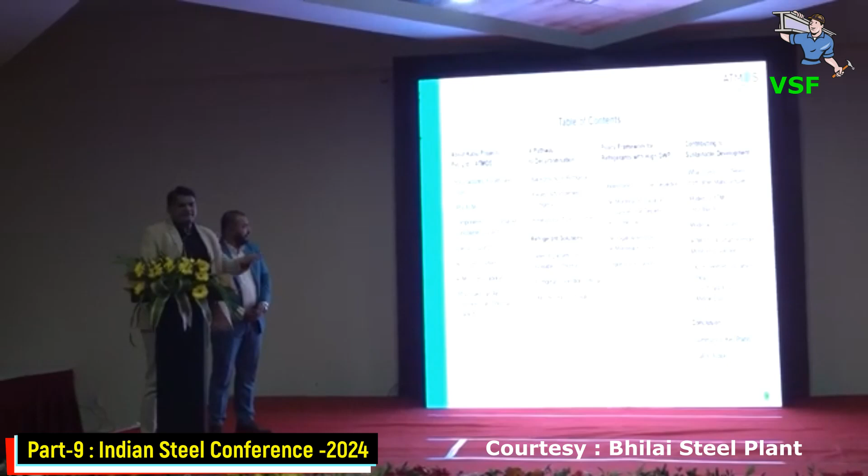About Kabu Projects: Kabu Projects Limited is our company name, located in India. The important part of our company is that it is Make in India but with German technology. Atmos is our brand name. These are the various industry grade air conditioners which we can use in high applications. This is our factory in Noida.

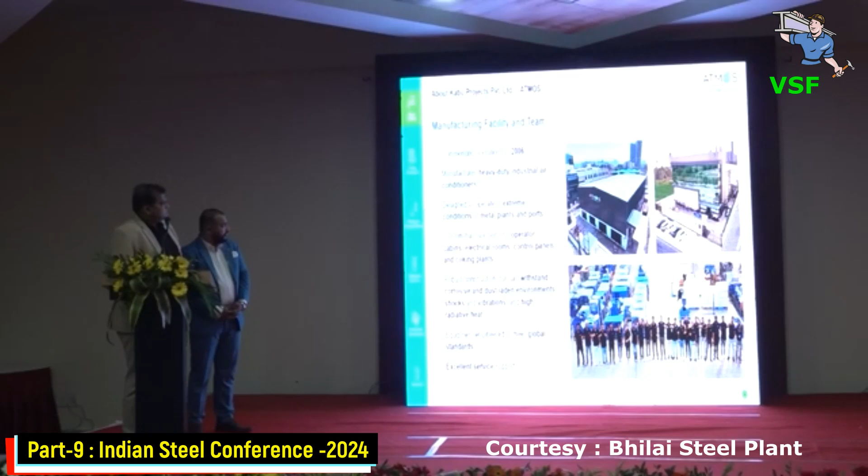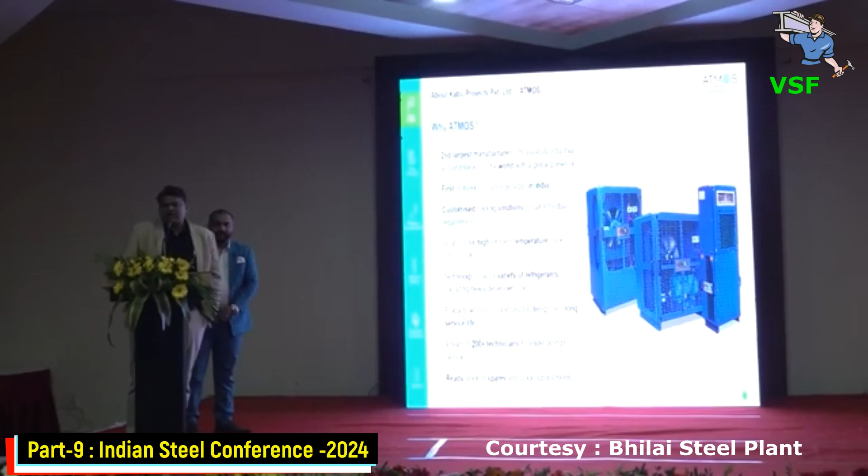The specialty of Atmos. Why Atmos? The Atmos AC can work up to a temperature of 90 degrees Celsius, so it can be used in SMS, steel melting shop, your hot strip mill, coke oven. So in all the steel applications we can use our Atmos machine without any hindrances.

These are the various components. Most of the components we are using in the air conditioner are of the latest technology and of very good quality in the world. So for our product, don't worry, we are there to provide you one of the best products in the world, and that too with the most eco-friendly equipment and components, including refrigerant. These are the heat exchangers.

The important part of Atmos is that whatever machine we are making in-house, we are testing in-house only. We keep all the stringent conditions like temperature, 90 degrees. We can maintain that temperature in one room and test our machines so that you will get a machine with accurate performance. These are the various components.

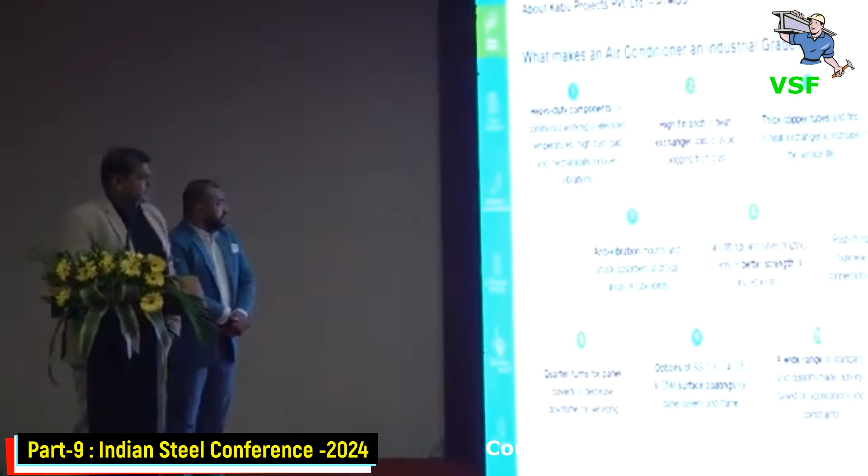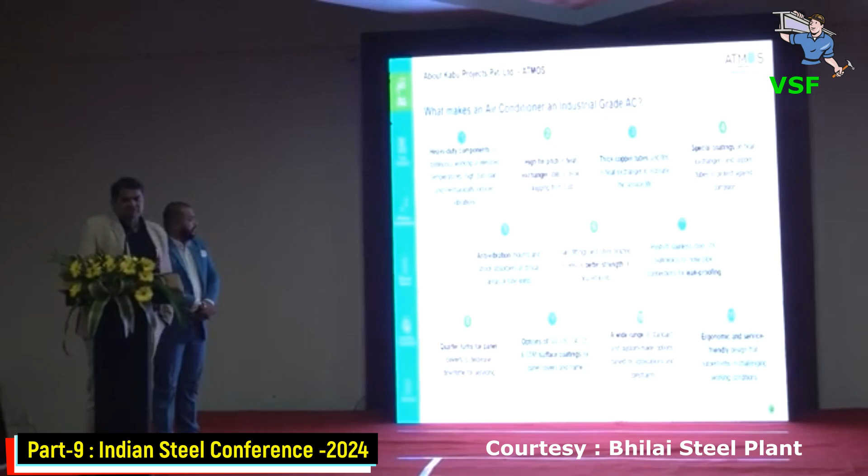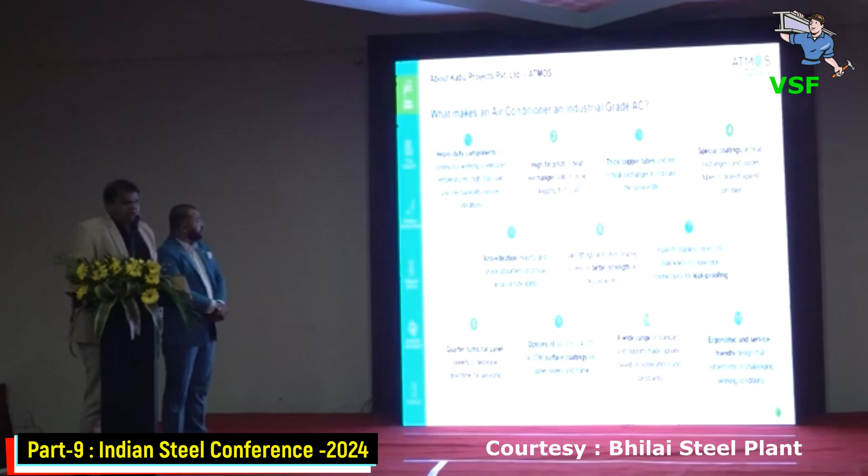The specialty is that our AC can work, as I said, in high ambient temperature up to 90 degrees. Also, in the most dusty environment, our AC can work without any hindrances. And in very stringent conditions like the coke oven, where various gases are there, our ACs can work. Vibrations are also taken care of through design, so that any kind of vibration will not affect the performance of the AC. We can use stainless steel plates also as per the application. Now, the next part is decarbonization, which my colleague Raj will take you through.

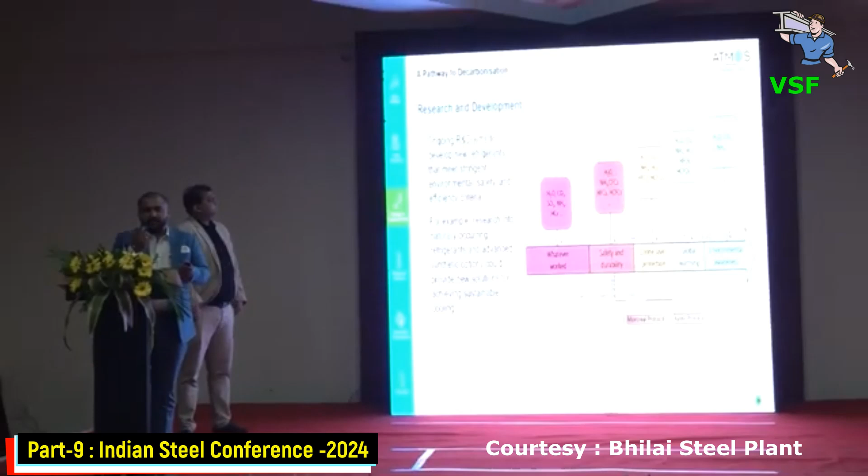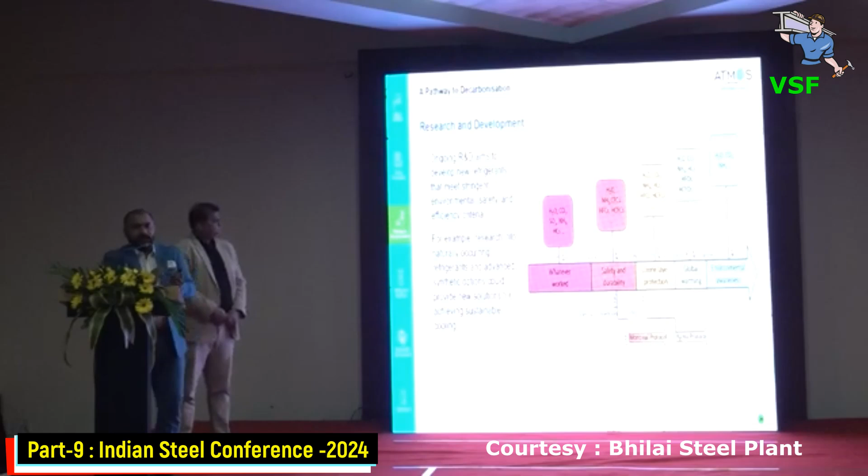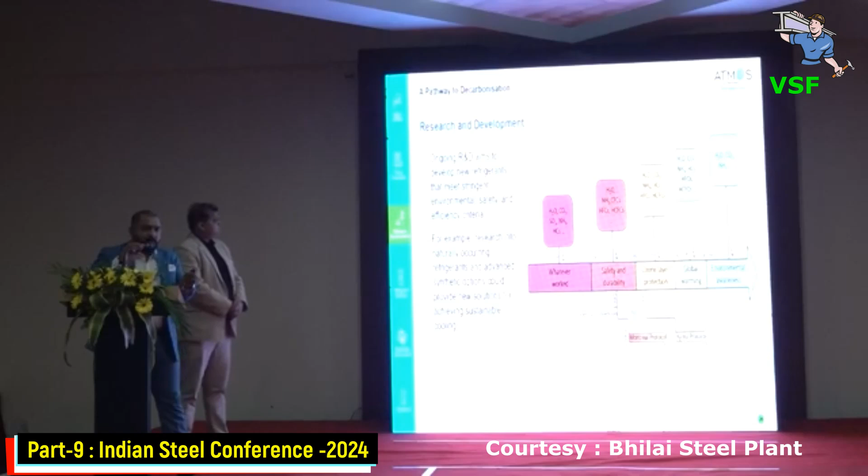Now we need to cover, control and safeguard the ozone layer because of the harmful UV rays that come to us, and it is not preferably good for our human health. So on that basis we wanted to safeguard it. So how could we do it, this was the reason it came up. And these were the responsible people and the conferences around who actually started implementing protocols and laws to regulate these things around.

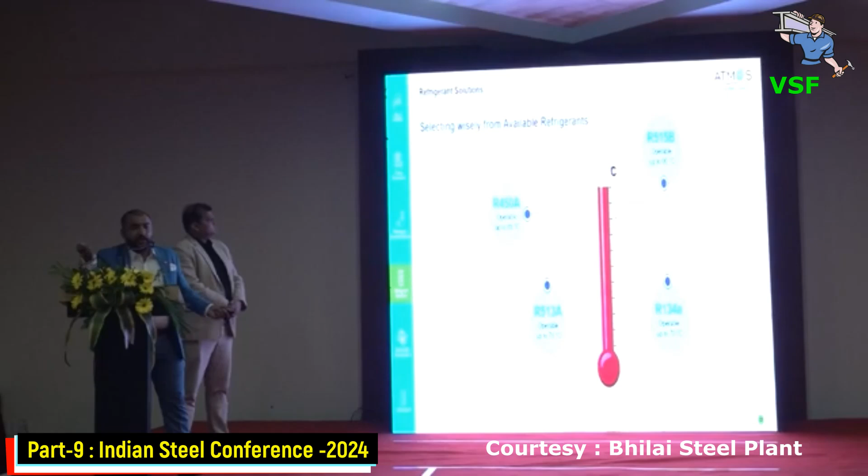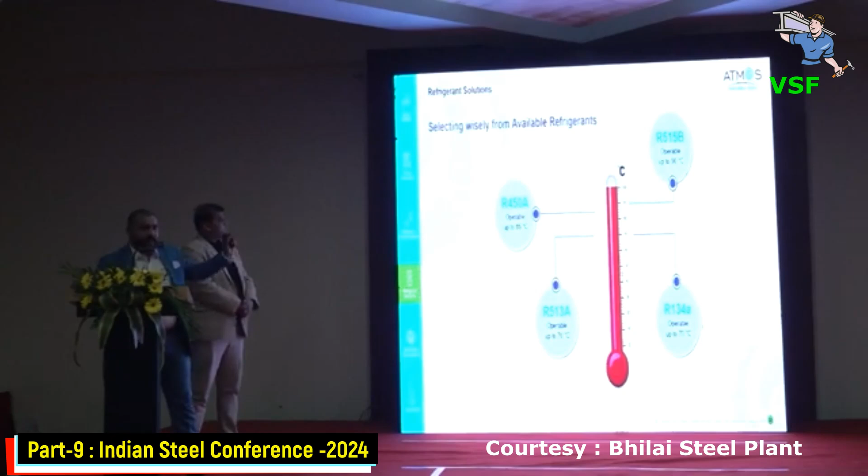R134 we all know, everyone who rents a car. In cars, the refrigerant they use, we call it eco-friendly refrigerant, that is R134A, but even this has a carbon footprint. So this trend of minimizing it is making us work towards getting an optimum solution and replacements for the existing refrigerants that we are using. So currently 450A is the beneficiary that has been recognized as of now.

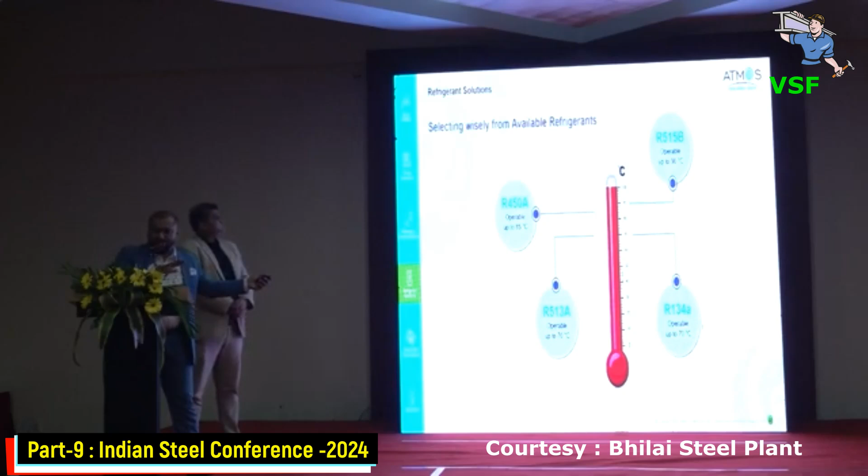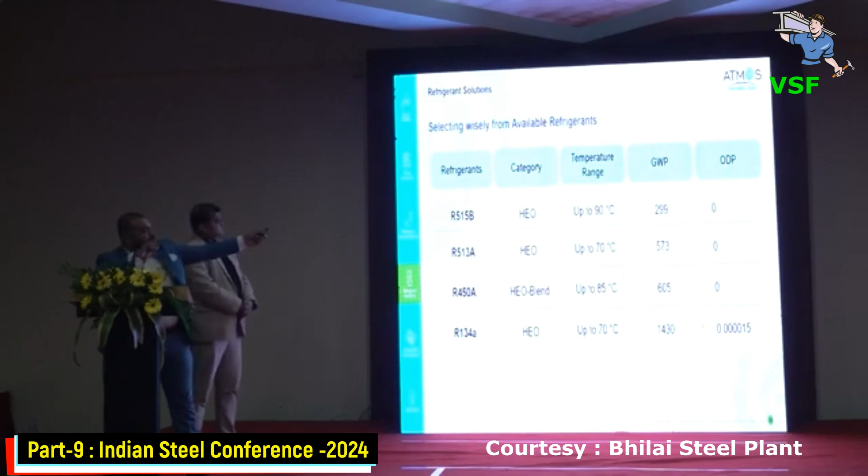This is a range just to understand how it works. GWP is global warming potential and ODP is ozone depletion potential. So these are the refrigerants. If you can see, R134, as I rightly told you, the carbon footprint for it, the global warming potential is 1430, and it also has an ozone depletion potential you can see here on the figure.

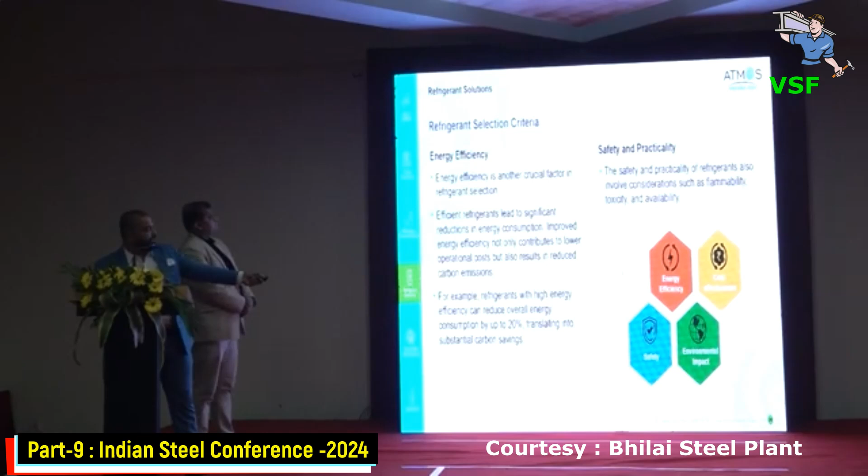So how do we choose, what is the necessity and phenomena to understand and choose a refrigerant? It's based on the following factors you can see: first, environmental impact; second, safety; then cost effectiveness and energy efficiency. Based on these, we choose a refrigerant and then it is made to work.

Our machines are already running in the rigorous areas of SAIL, coke oven. So if our machine is sustaining that area, that environment, it can run anywhere around the SAIL, anywhere around the globe.

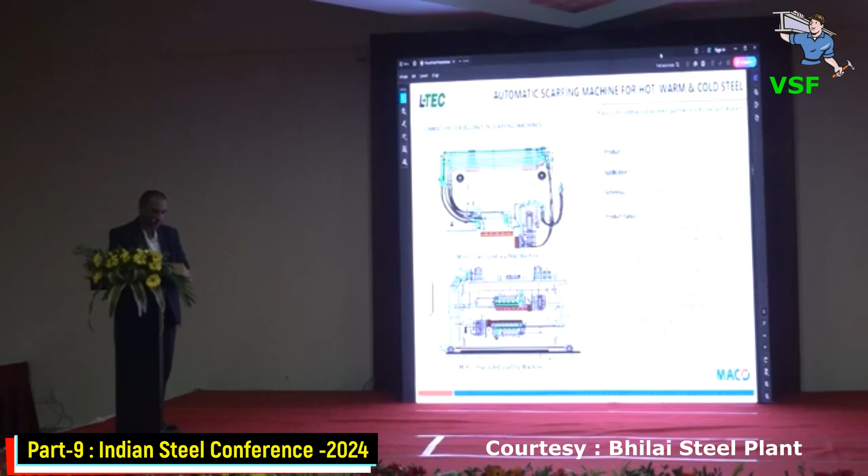Oxy cutting machine for the continuous casting machine, CCM.

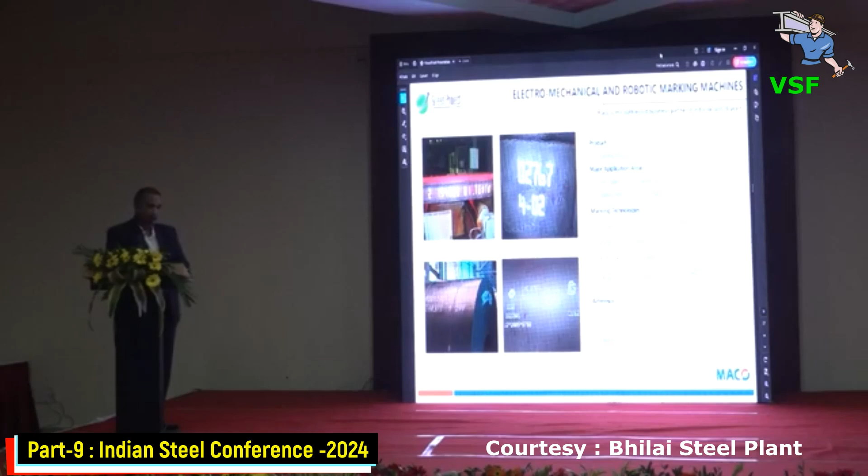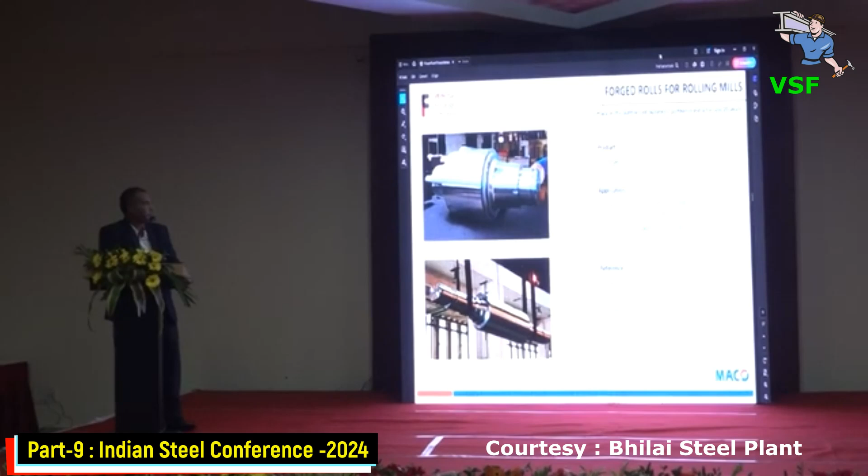Laser welding machine, CO2 and solid state type for the coil joining. Cobra neck hydraulic buffer. Formosa industrial gearboxes.

Genie articulating telescopic boom and scissor lift. Our product range is aerial work platform, scissor lift, articulating boom, telescopic boom, and maintenance platform.

Ansul make fire suppression system, for the metal processing equipment.

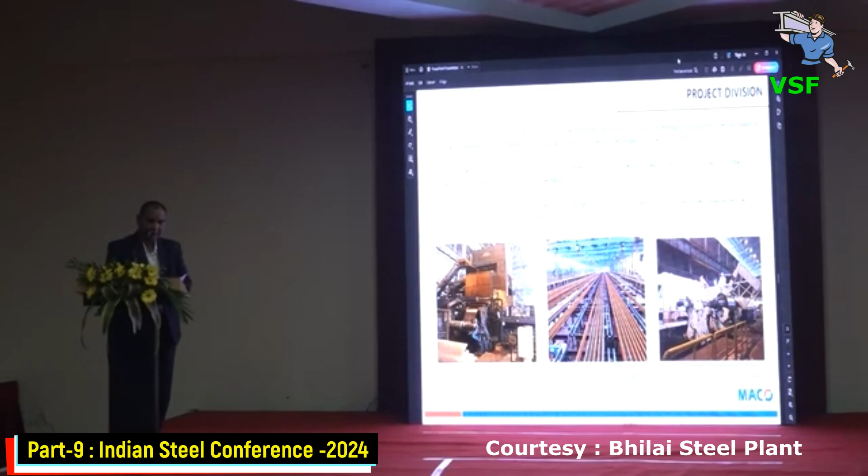The rail welding line for 260-meter long rail at SAIL Bhilai Steel Plant, installed in the URM area in Bhilai Steel Plant.

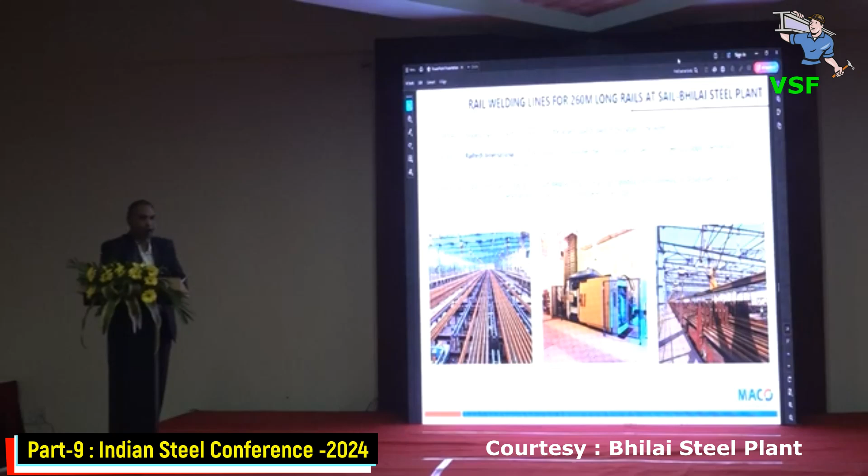Refinishing complex at SAIL Bhilai Steel Plant. It includes two packages: package 1 mainly for equipment supply, installation and commissioning, and package 2 for PEB - pre-engineered building. It's the first of this type of fabrication unit. The pre-engineered building is supplied by MACO in the SAIL area.

Roll and repair shop at Bhilai Steel Plant. In the URM area, the carbide preparation unit, carbide blade preparation unit is supplied by MACO Corporation. Complete installation and commissioning is done by MACO Corporation.

Installation of high pressure primary descaling at plate mill of SAIL Bhilai Steel Plant. The project is right now in the execution part, right now in the execution area.

Hydrogen bell annealing furnace at SAIL Bokaro Steel Plant. Skin pass mill at SAIL Bokaro Steel Plant. Tension leveling and inspection line at SAIL Bokaro Steel Plant. Slab marking machine in CCS at SAIL Bokaro Steel Plant.

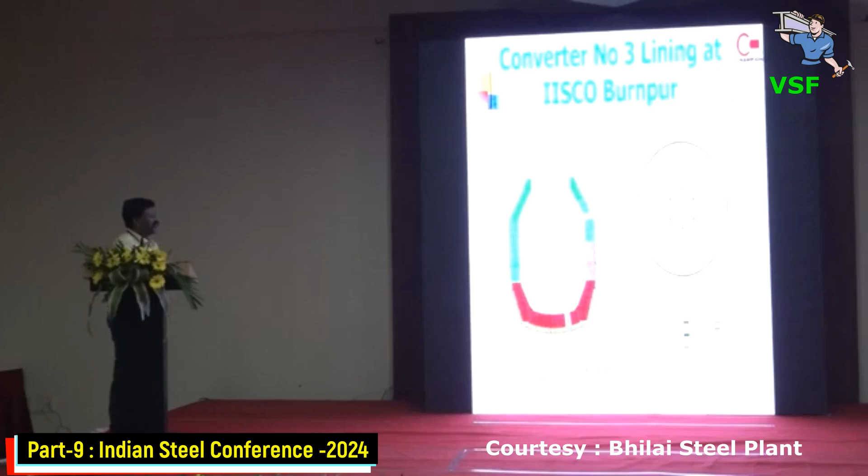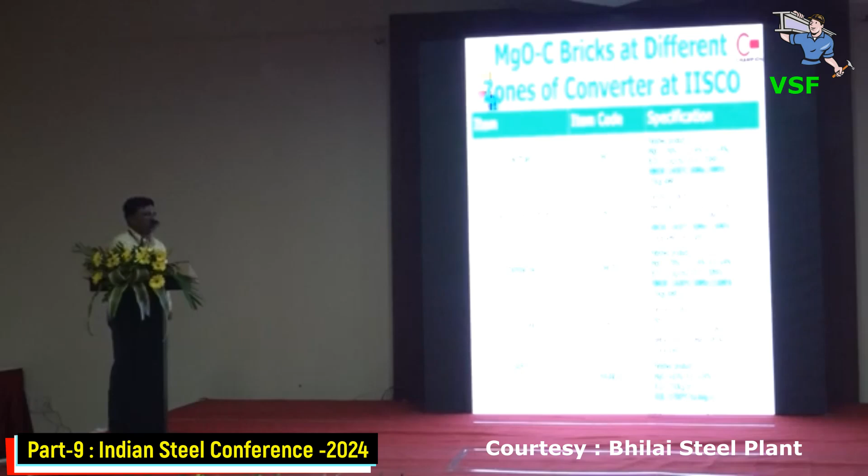But the most important thing to be mentioned is the HMOR, the hot modulus of rupture, that is strength at elevated temperature, which is around 140 kg per centimeter square, one of the highest we have achieved. Now this is the bill of material, the total bill of material. This is basically the sleeve, block, and the taphole sleeve being used.

So earlier the target life of this converter, the guaranteed life, was 3,500. The highest life they had achieved was 5,800, and as I mentioned, it is running around 7,800 heats. So we had targeted some number of sleeves, but as the life is going, we are supplying the sleeves. The sleeve life is around 100 heats.

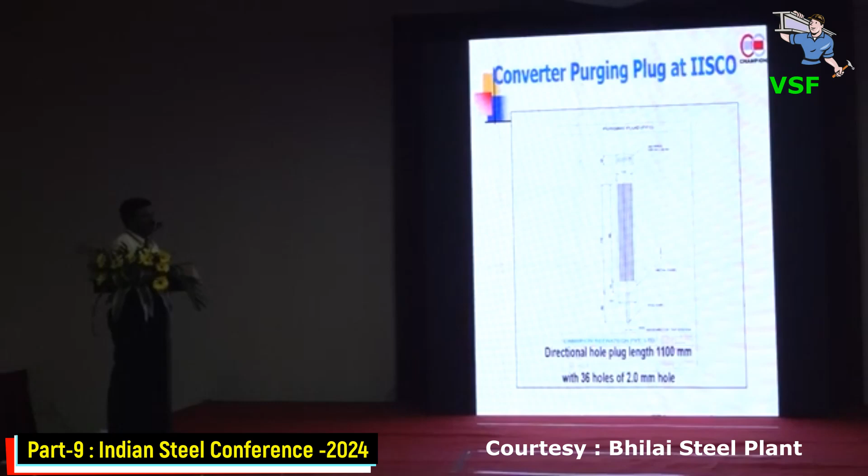And this is the purging element. It is basically a directional hole purging element. They have 36 purging holes, about 2.0 millimeter, and they have used it up to 3,000 heats. The top and bottom ring after that converted into the normal top ring.

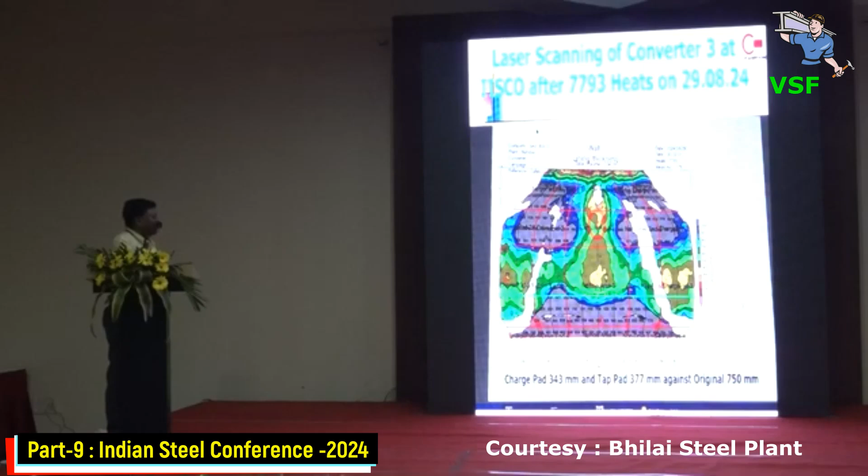And this is the laser profilometer being used, and this is the graph where you can find out the tap pad thickness, as I mentioned: the charge pad is 343 millimeter, and the tap pad is 377, out of 750. This is the bottom thickness we are getting. It is varying between 1359 to 1751, and we are doing the bath height measurement along with the lance position, and the total volume is being maintained to maintain the H/T ratio.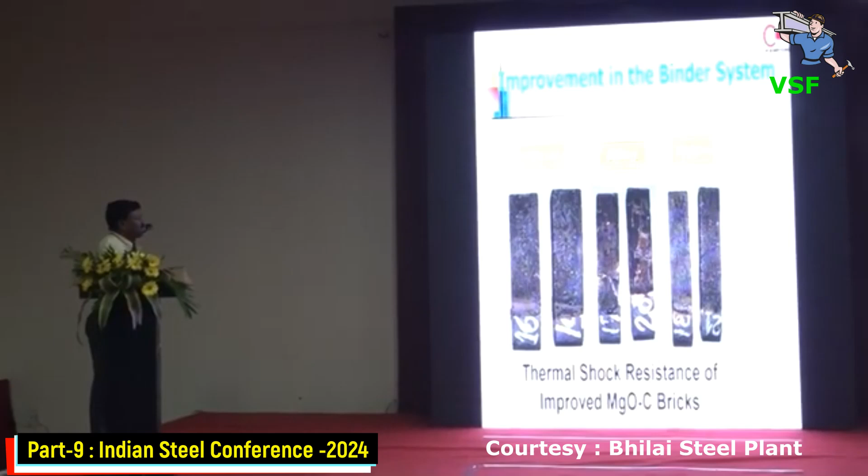This is the thermal shock resistance; it's a dynamic test where you put the magnesia carbon dip into the induction furnace, and then you can find out the different types of crack and thickness. And this is about the thermal shock resistance test. You can see the binder plays an important role. Binder 1 is giving a lot of cracks, binder 2 not much, but we are using a combination of binder 1 and 2.

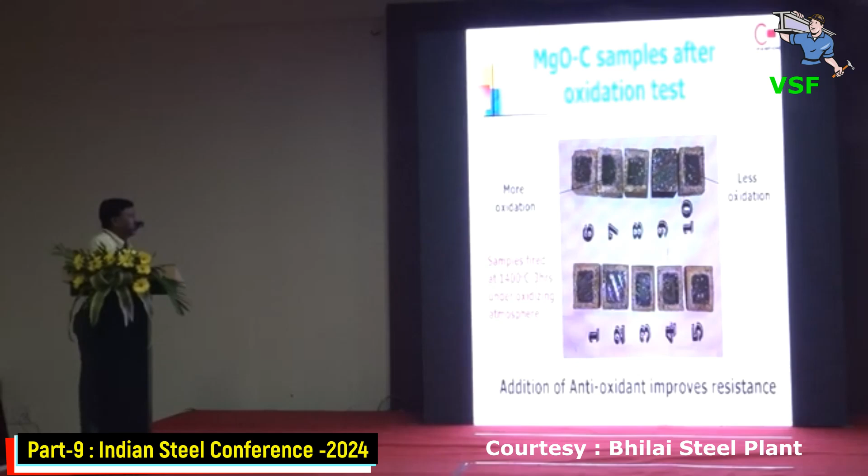At this moment, I must mention that our plant is situated in Champa. We are producing at present 3,000 tons of magnesia carbon bricks. Our turnover is about 450 crores now.

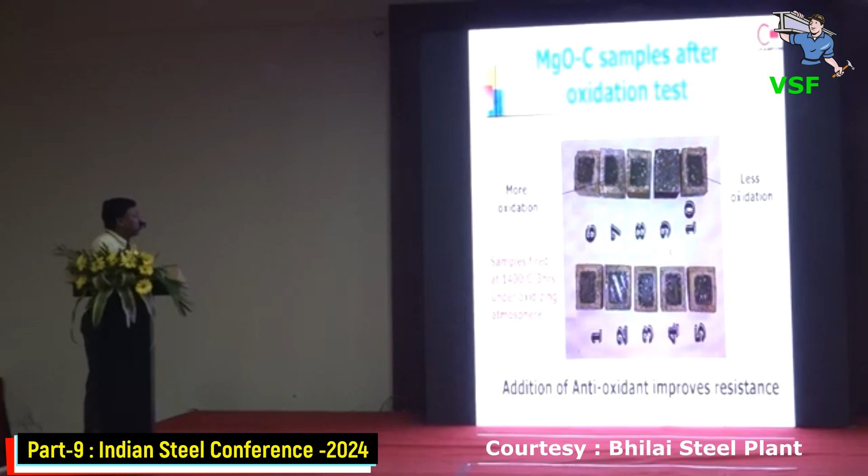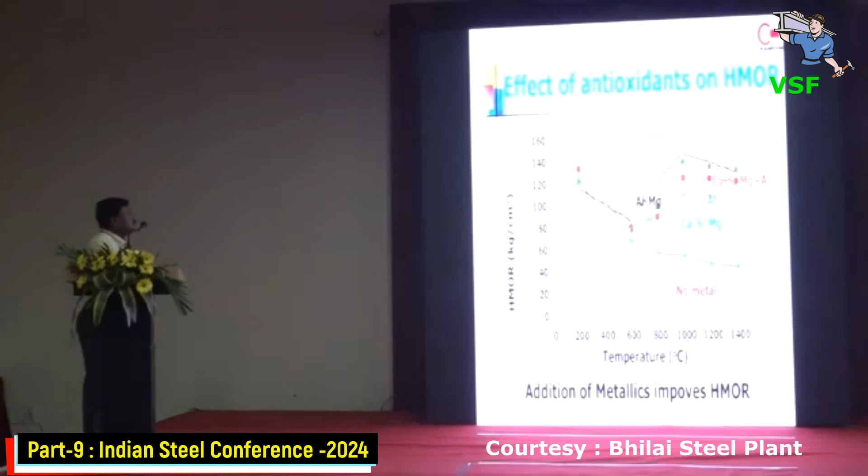This is one of the most important things, the oxidation resistance. We do the oxidation resistance test. The white area is oxidized, the black is not oxidized. The more black, the better. And for that we use a special antioxidant. If you collect a brick sample from the furnace, you can find different zones, like the slag surface, decarbonized or original. The more original there is, the better. So this is the antioxidant, and you can get the HMOR more than 120.

And we have done some study on slag, because basically it's monitoring of slag. The slag should have properties like low melting, low viscosity, low surface tension. And we have done some phase diagram study. In this phase diagram, we found that if you can produce tricalcium and dicalcium silicate, the melting point is 1990 to 2030. And if you have calcium ferrite, it is 1216, or fluorspar, which we add for fluidity, it is 1340. So we have to avoid all these things.

For converter, we need magnesium oxide. Those are the phases we have to get so that you get better life. We have also done slag coating and slag sticking studies, because basically we have to give a good slag coating. So we are making bricks having good permeability, so that we get good slag sticking, and that's how we can develop the slag.

Another important one is the MgO saturation, depending on the basicity of the slag, whether it's silicon killed or aluminum killed. So we have designed the refractory so that you have less saturation. For converter, basically with basicity more than 3 you get only 6.5%. And in the ladle, if it is less than 2, you get more, about 12%.

And for that saturation, because steel making is nothing but slag making, you should have good lime. That is basically low LOI and high reactivity, reactivity more than 300, and dolomite also the same. So we have developed a slag modifier, because if the slag is not in a position to give you the proper reactivity and slag making, so this is in briquette form.

So I have validated two strength properties, that is characterization of its shakedown properties, and found out how it is environmentally better to use. So first of all, this is the engineering property, that is shakedown. It means that whatever stresses come to the aggregate, it makes the aggregate in a stable condition, and if the load exceeds the stable limit, it converts elastic strain to plastic strain, so the curve shifts from elastic strain to plastic strain. Plastic strain is nothing but the plastic shakedown limit.

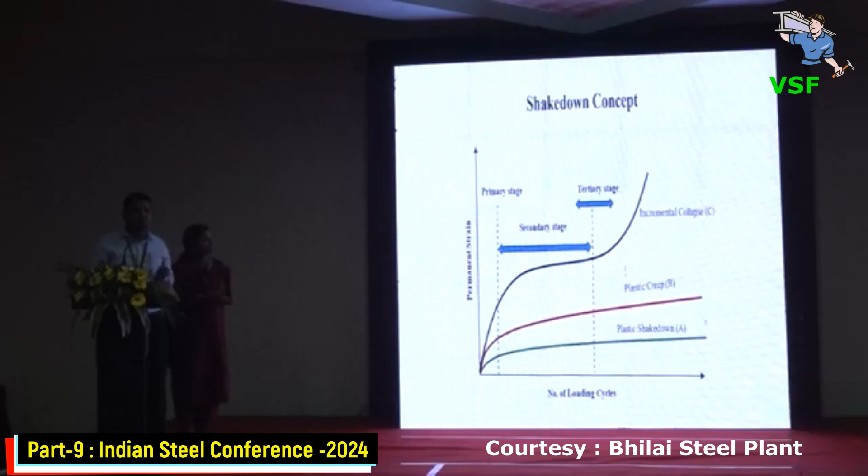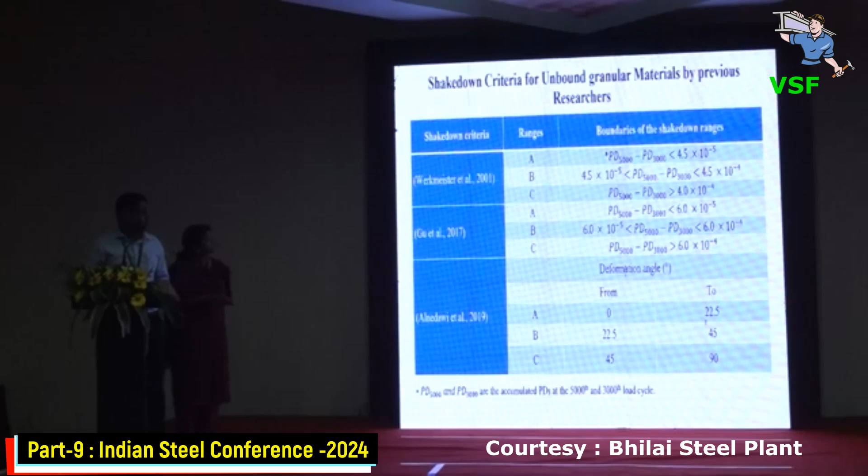So we have to test the strength characteristics of the aggregate before using it in a base or sub-base layer. That is the base or the foundation of the road. So I have validated its properties. These are the previous literature works that satisfy the permanent deformation of the aggregates in 5000 to 3000 load repetitions, whatever plastic strain should come to the aggregate.

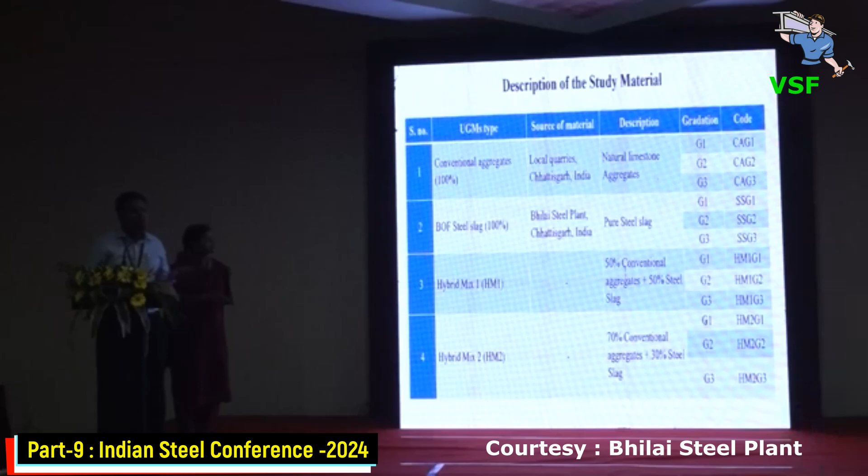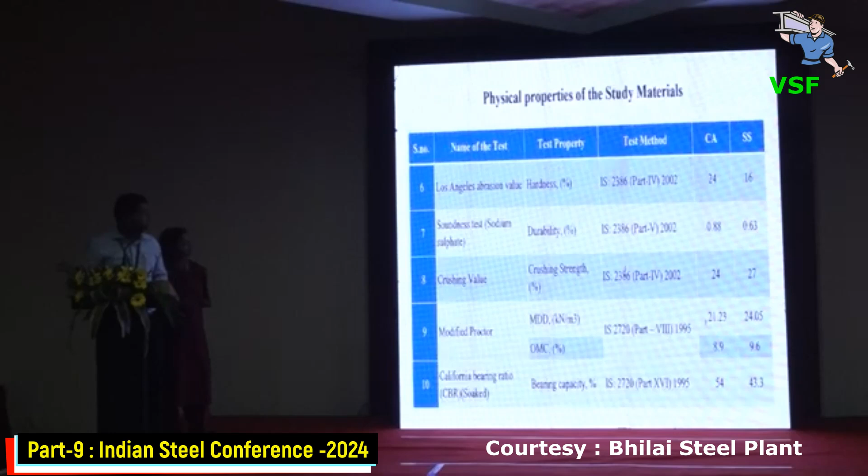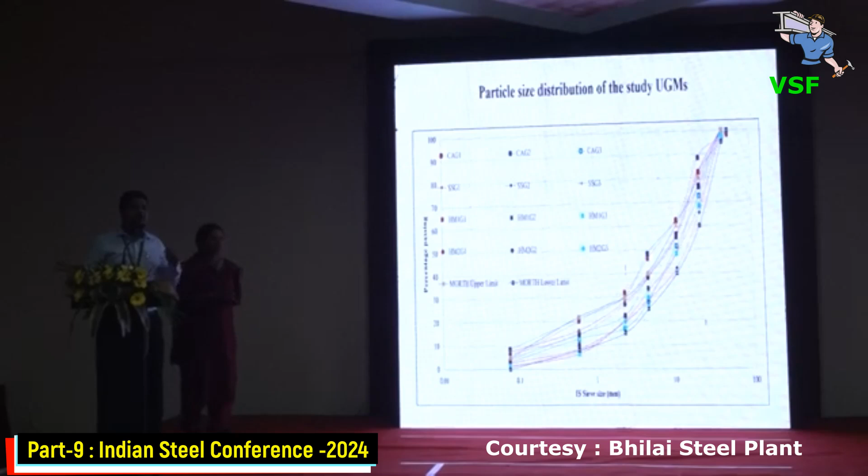We have collected steel slag from different depths that satisfy different ages, that is less than 1 year from the top layer, then beneath 5 meters we got 1 to 10 year old steel slag, and after 5 meters we get greater than 10 year steel slag. So depending upon the age we have categorized the properties.

So these are tested in 3 moisture conditions. OMC is nothing but optimum moisture content at which we are making the roads or the materials to be utilized. And OMC +2% means if it comes in contact with rain, whatever the swelling nature and wetting properties, we have defined by increasing the moisture content 2%, and OMC -2% means if it is tested in the dry condition, whatever property it is giving.

First, the introduction. What is the surface defect in rolled steel? The imperfection that occurs on the surface of the steel during the rolling process is known as the surface defect. It may be of different types like scars, holes, bubbles, inclusion, iron oxide scales, roll printing, edge cracking, and scraps. The main idea behind this work is: can artificial intelligence automatically classify and detect the surface defects?

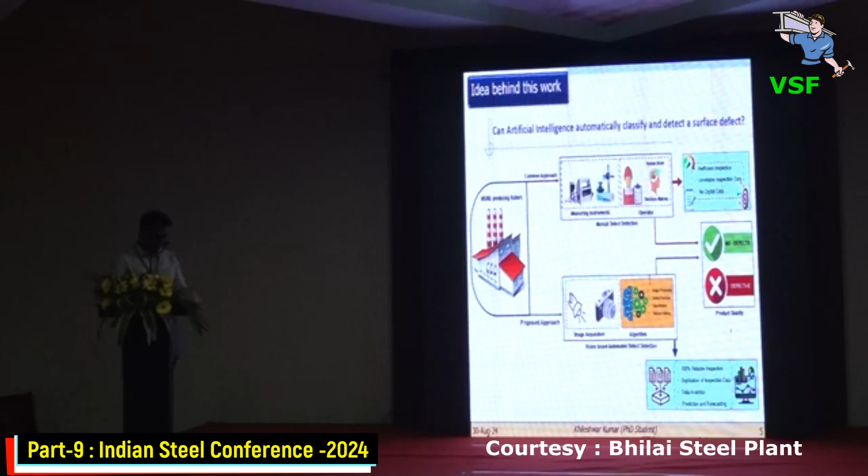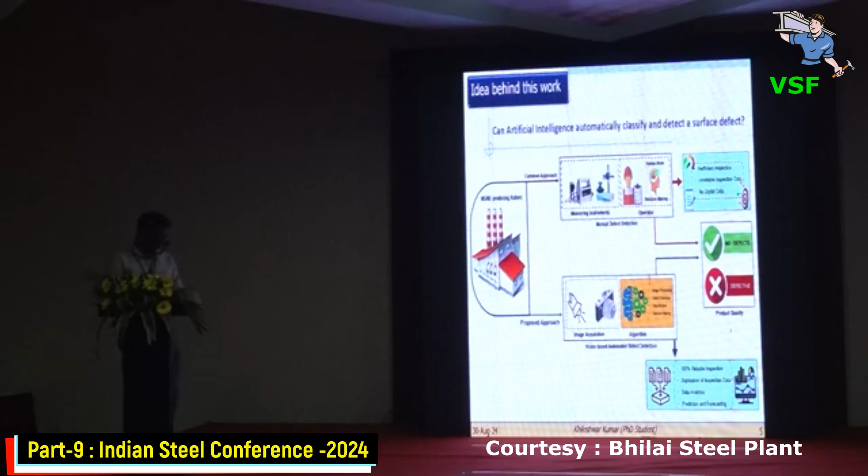Previously, the surface defect was identified by measuring instruments and the operator. This may cause problems of insufficient inspection, unreliable inspection data, and no digital data. So we have proposed an algorithm for automatic image acquisition, and the algorithm will detect the steel surface and classify whether the surface is defected or not defected.

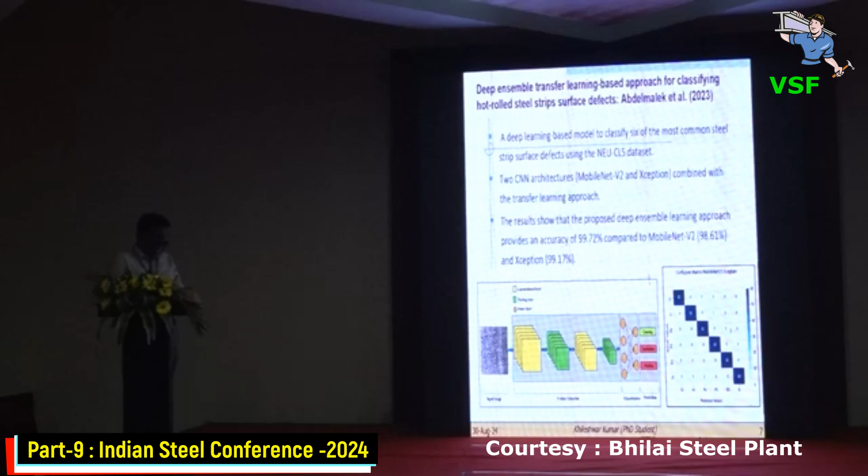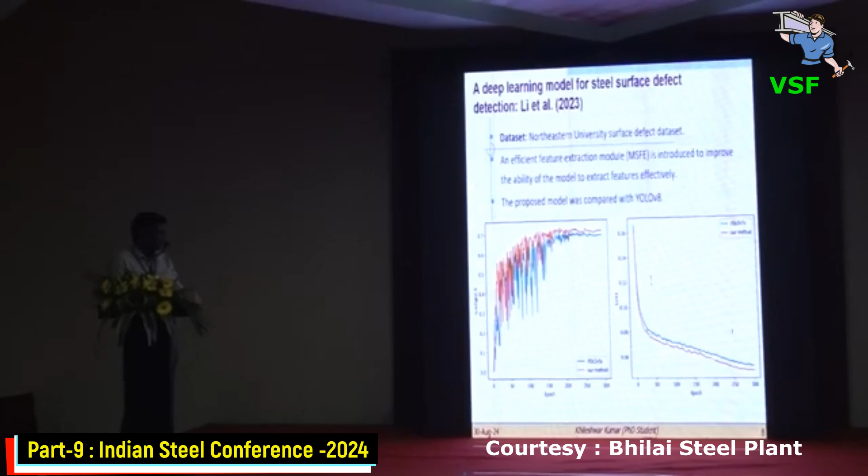Based on this, some previous work has already been carried out by different authors. The first paper is a deep ensemble transfer learning based approach for classification of hot rolled steel strip surface defects. In this work, two CNNs, MobileNet and Xception, were combined for the classification of six different types of steel surface defect. In the next work, a deep learning technique was used to detect the surface defect. This work was compared with YOLO V8, and in this work the mean average precision was 0.7.

So for improving the accuracy, we have proposed an algorithm where a NEU surface database was used to detect and classify the surface defect. 1800 sample images were collected: crazing, inclusion, patches, pitted surface, rolled-in scale, and scratches. Six different types of surface defect were considered, and the Detectron 2 architecture was used.

This deep learning technique is based on two parts: the first is the backbone network and the second is the region proposal network. The backbone network obtains the features, and the second uses those features for detection and classification of the surface defects. Based on this algorithm, I have obtained this evaluation result. The average precision for crazing is 37.17, pitted surface is 67, inclusion 76.548, rolled-in scale 75%, patches 64.95%, and scratches 84.64%.

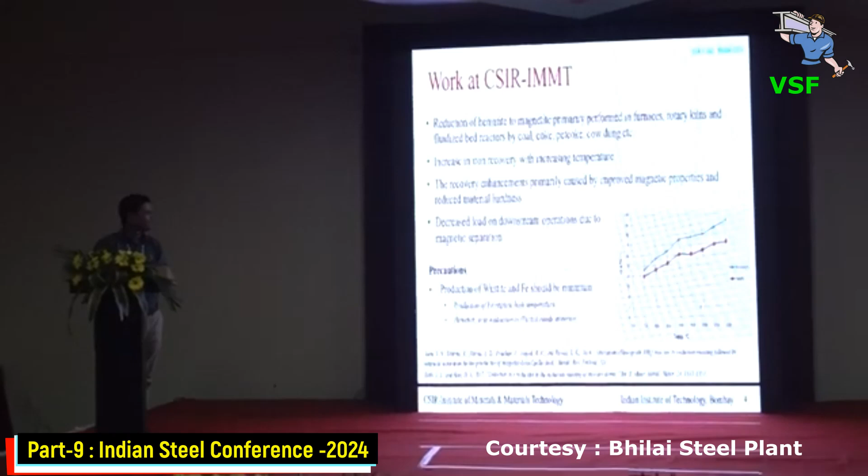This process has been tried and tested very well in other countries, primarily China, but we are refocusing it for Indian ore characteristics, which are obviously different. So conventionally, in a blast furnace or any other furnace, we reduce hematite directly to metallic iron. Intermediate products are magnetite and wüstite, and many other phases, but these are the primary phases. Due to temperature and gas concentration, these phases are not stable, so we are not considering them. But when we apply this process to low-grade ores, it is not responding.

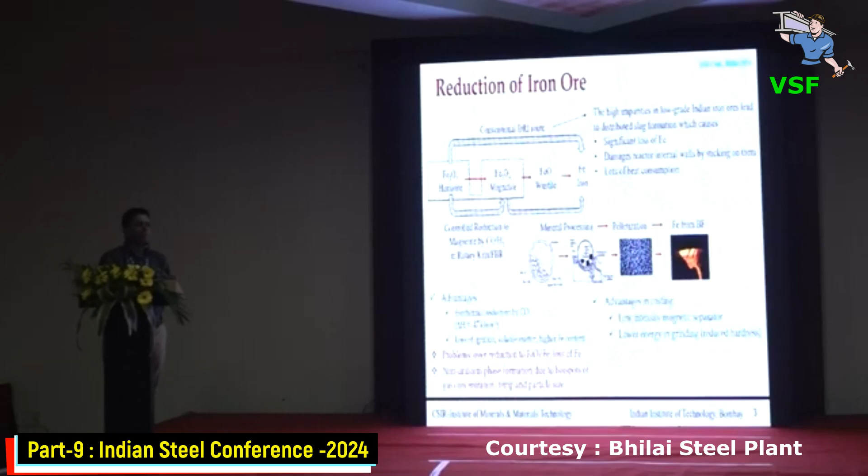So what we are suggesting is controlled reduction up to magnetite, so that the magnetic susceptibility of this material increases significantly and we can do magnetic separation. The load on downstream operations is also low, and with high temperature operation, porosity is created, which makes grinding easier and less energy intensive. There are many advantages: the process is low cost, and most importantly, it lets us deal with low grade ores, which is the main problem nowadays.

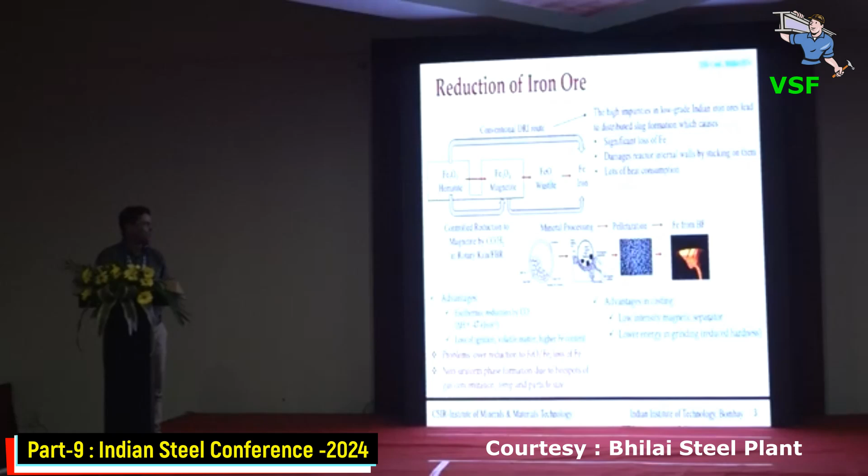CSIR has long been working on this technology, and we have tried different reductants like coal, coke, pet coke, even cow dung and biochar for this process, and it has been reported well in the literature. We have found that with increasing temperature and reductant concentration, we get good results in terms of Fe grade and recovery.

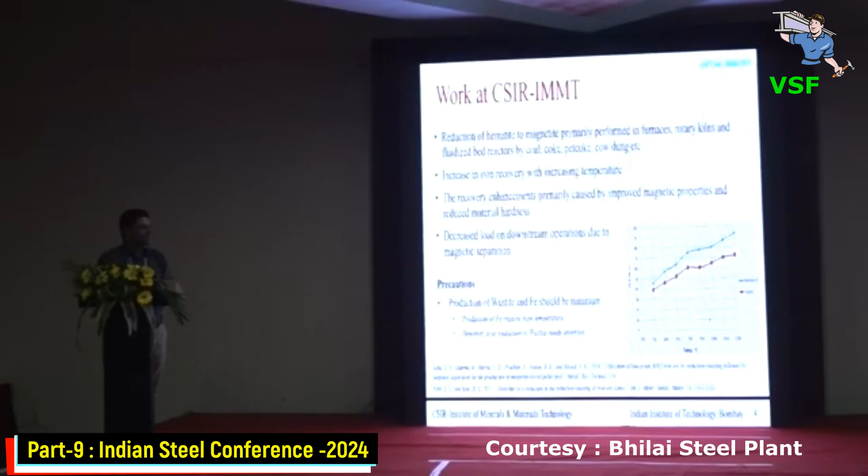The problem is that when dealing with lump ores, this process is okay, but when dealing with fine ores—a good resource of low grade ores in terms of slimes, tailings, and previously discarded ores, primarily in the form of fine particles—we face the problem of over reduction. Instead of the material getting stuck at magnetite, it over-reduces to wustite and metal iron, causing a significant loss of Fe in those forms.

After doing the optimization, we found that around 20% carbon monoxide concentration, balanced by the rest as nitrogen, gives the best results at this concentration. Around 99% conversion of hematite to magnetite is happening, with only less than 1% over-reduction occurring.

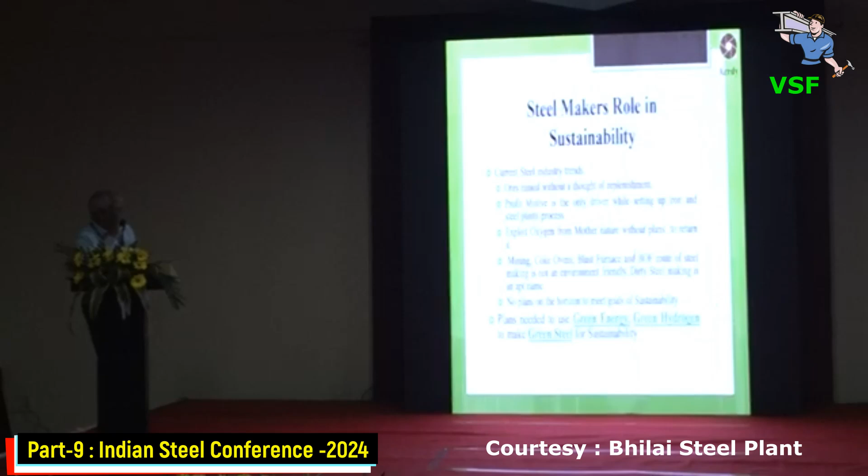Profit motive is the only driver while setting up a new steel plant process, and presently the industry is exploiting oxygen from Mother Nature without plans to return it. The mining, coke ovens, blast furnace and BOF route of steel making is not an environmental friendly process - it is the dirty steel making process, as the term names it. But today it is the only profitable method of making steel, so people are going through this route.

No plans are on the horizon to meet the goals of sustainability. Once you are not able to sustain - what do you mean by sustain? It means you take and give. Give and take is not there. Those plans are needed to use green energy, green hydrogen, and to make green steel for sustainability.

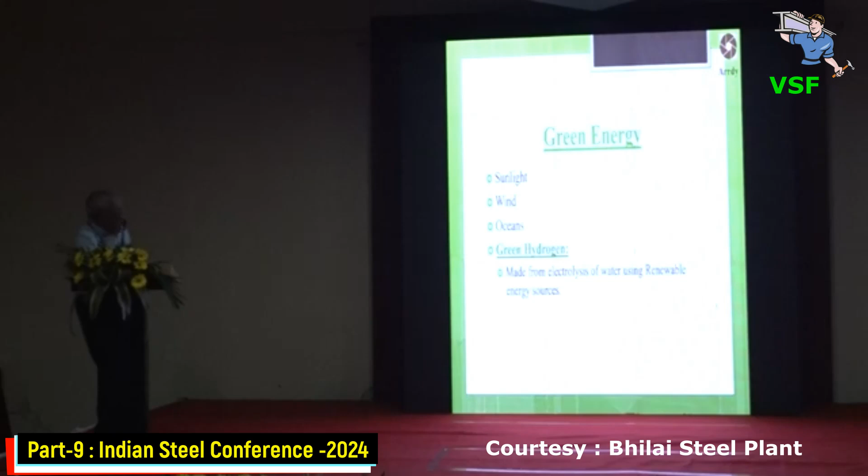Now, what is green energy? We get green energy from sunlight, wind, and oceans, and green hydrogen is made from the electrolysis of water using renewable energy sources. The renewable energy sources are three - wind, sun, and oceans.

The green steel is made using green energy and green hydrogen. Green steel is currently not very profitable, but needed to maintain the balance of Mother Nature. Ores upgradation and reduction with hydrogen is important because the ores which we get from the mines - I have detailed this in my paper, which is maybe there in your books - have to be upgraded at the mine head, so that we don't carry all the dirty ore up to the plant and then again generate slag and scrap. The ore has to be upgraded so that we get higher metallic content.

The second point is ever increasing scrap recycling and improving the scrap recycling process, melting in EAF using renewable energy, and reducing with hydrogen wherever needed. This would be an ideal environment friendly process for green iron and steel making.

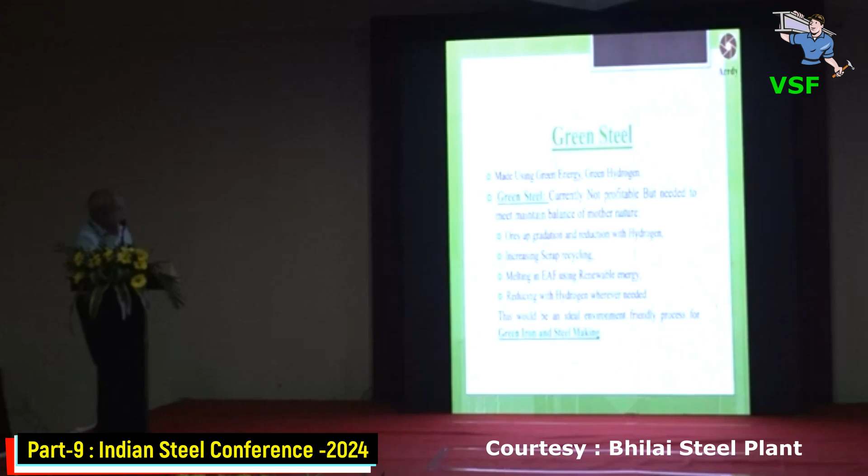I think that's all I want to tell you about it, because this is a very high concern, but nobody has addressed the issue of oxygen depletion, which is not easily renewed. Only we are talking about carbon, which of course has a harmful effect directly, but oxygen depletion is also a cause of very big concern, and it has to be addressed in a very urgent and emergency manner. Thank you very much.